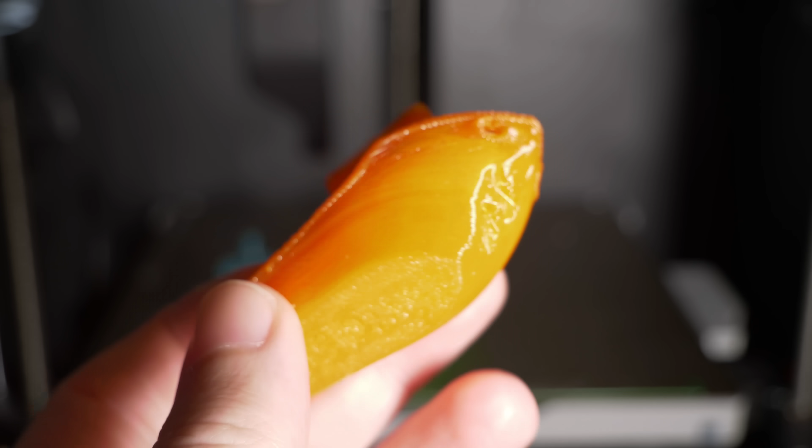How long do you reckon it would take to print a TPU Speedbenchy? It's not the fastest material in the world after all, is it? We know that. An hour? 2 hours? 5mm per second, right? Wrong. Let's go.

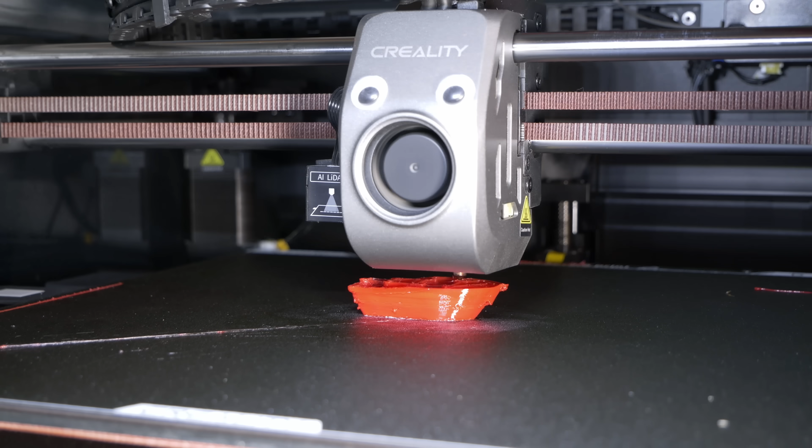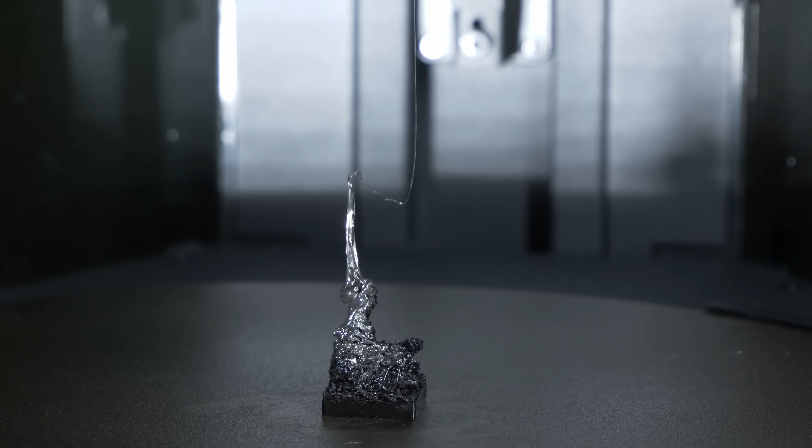So this is 95A TPU. If you came from the other video about softer TPU, then welcome. If not, there are 2 videos out at roughly the same time, and they're both about TPU, but they're both different. They're both valuable. I would advise watching both. It's International TPU Week. It really is, because I have this video coming up too.

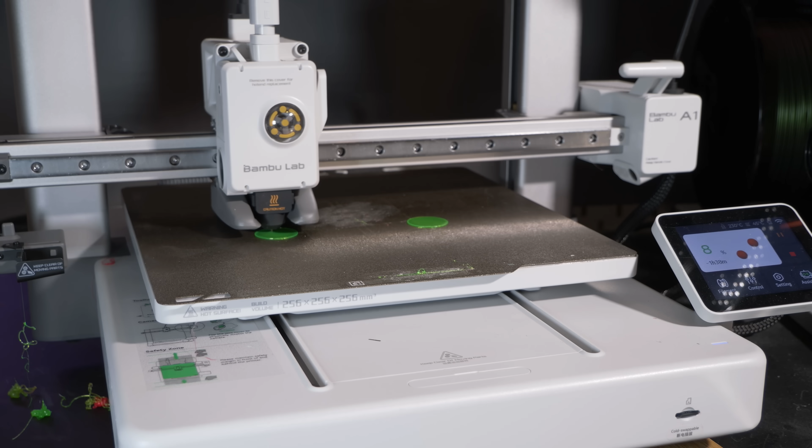But this video here is exclusively about 95A TPU. That is your common everyday TPU that you buy wherever, Amazon, anywhere. If it says it's 95A, then it's 95A. If it doesn't say it's 95A, it probably is 95A. It's sort of become the de facto standard for TPU. Printing it though used to be a hassle. I mean, it used to be a genuine hassle.

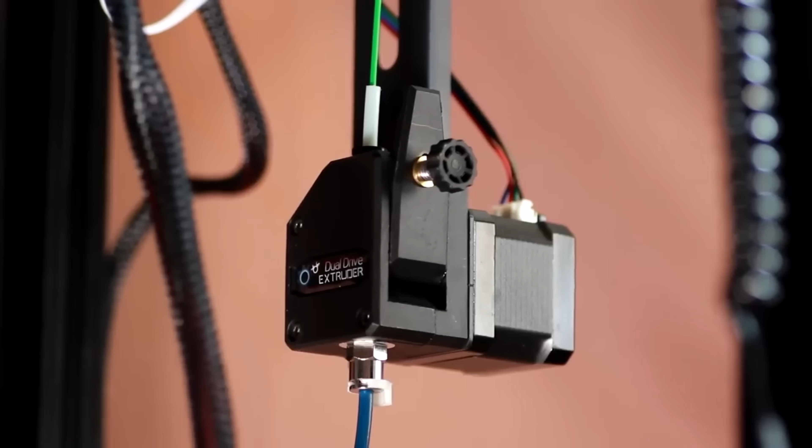So much so that I kind of became popular in the early days of the channel by making TPU tuning videos. Like this all-time great on how to stop your TPU printing like... I should have called it that, but I didn't. And various other videos about TPU. It's 2024 though now, and most of us don't print on these ancient heaps of Bowden. After all, that is the problem. Bowden. It was a mistake.

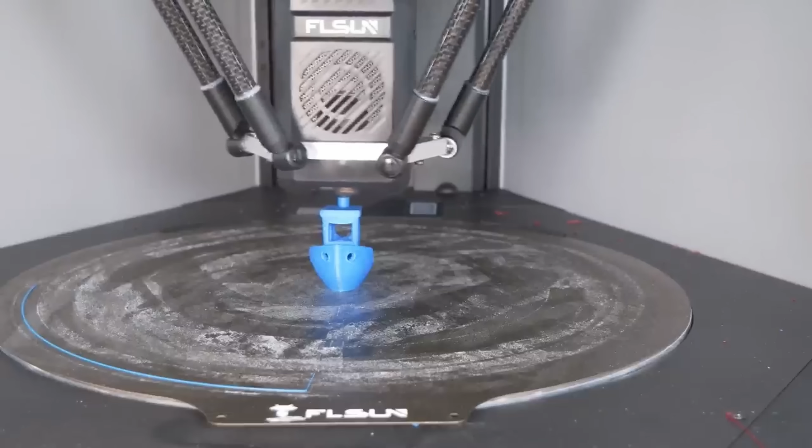I'm referring to this tube that goes between the extruder and the nozzle. And that, coupled with terrible extruder design, they were doing their best at the time, but it was a terrible time to be printing TPU. But those days are gone. Or are they? What we've seen in the last few years of 3D printing is progressively faster machines overall, driven by the unavoidable Benchy arms race. If you want to sell a printer in 2024, it had better do a Benchy in less than 20 minutes, otherwise nobody's going to buy it.

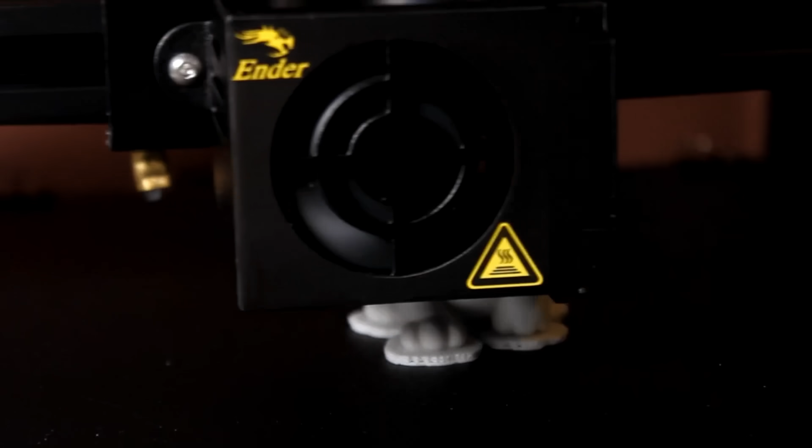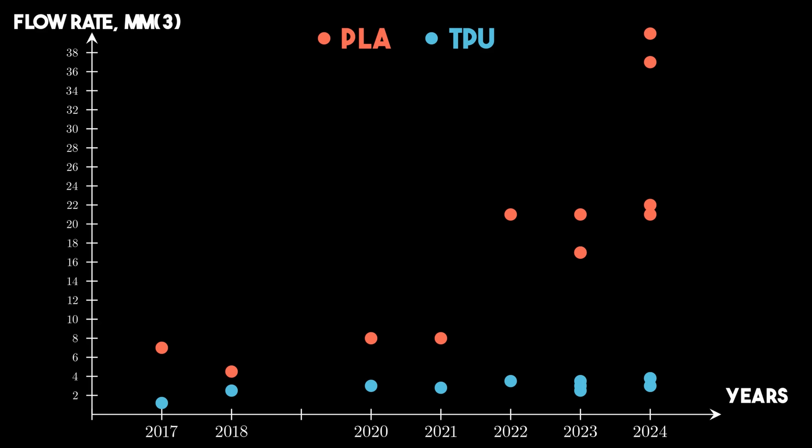What you'd expect to see is a corresponding upward trend in the speeds of all filaments. However, that does not seem to be the case. I did the same thing and charted out the default TPU profile speeds where they existed, or in the historical cases where apparently we didn't do that, we didn't have TPU profile speeds. As you can see, they are not tracking PLA speeds. Not even close. In fact, that kind of looks a bit like a flat line. We can clearly see that TPU speeds have in fact changed very little since 2018 in most cases.

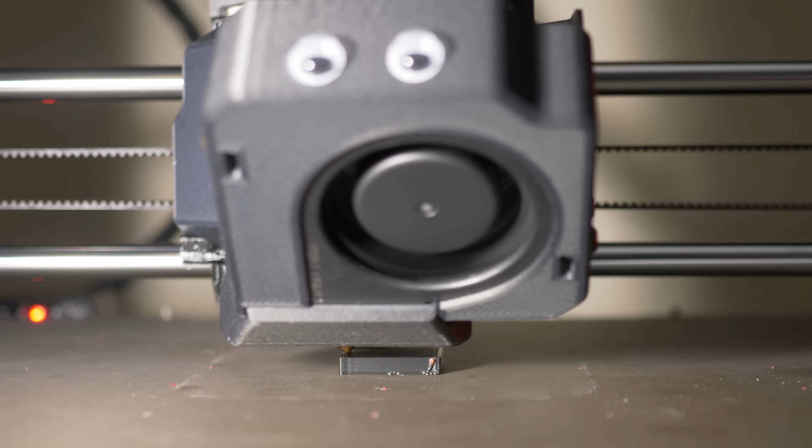If you look at the chart, you would think reasonably that TPU printing is just as slow as it was in 2018, and if you print using those default values, then it will be. Is this actually true? Are printers still just as bad at printing TPU as they were in 2018? That's what I wanted to find out.

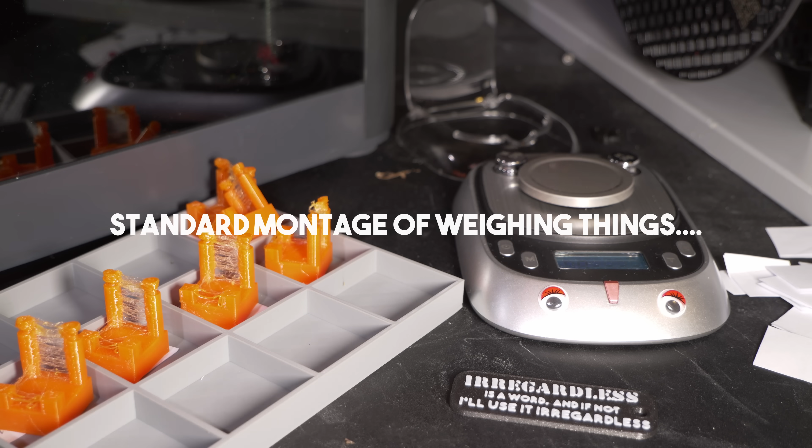This is my completely made up on-the-spot test model. You've probably met it already. The core is printed at 100% infill, so it's sort of a way of testing visual quality, but also extrusion rate by weighing it and using the 100% infill. It also tests stringing. I needed it to also not use much filament because TPU isn't cheap, and I actually bought this stuff myself for a change.

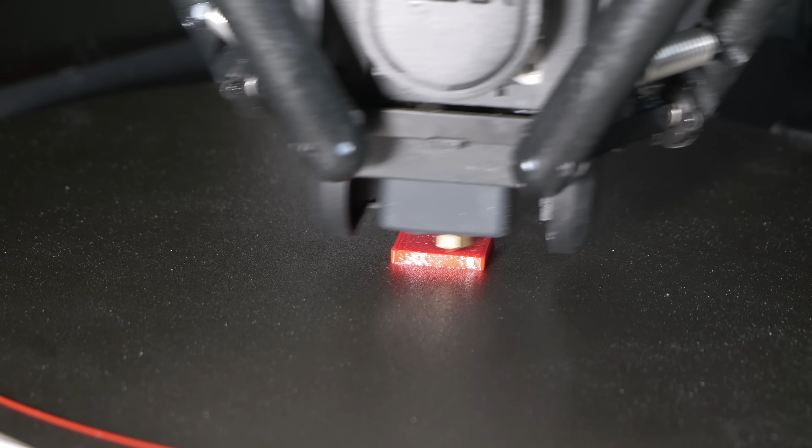We have Sunlu TPU in 2 colours and eSun in snot green. And I have a bunch of printers to test this on, and they're all fitted with 0.4mm factory nozzles, and they're all set up to print default line heights and widths and stuff on default TPU profiles where available. Default at least until I start speeding them up. All the printers performed fine at their default rates. Of course they would.

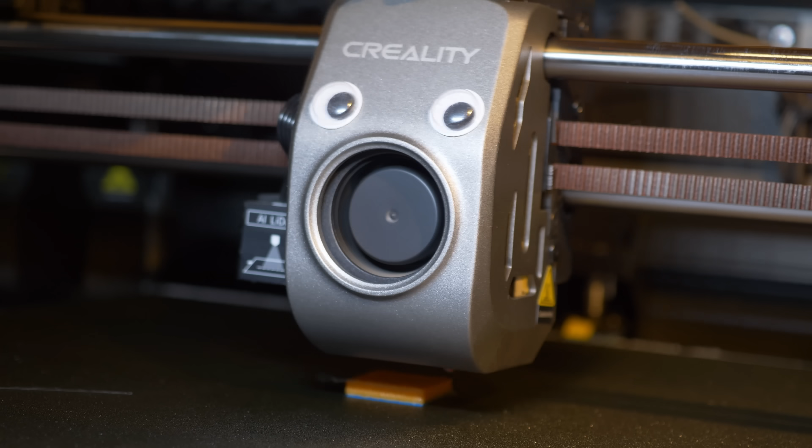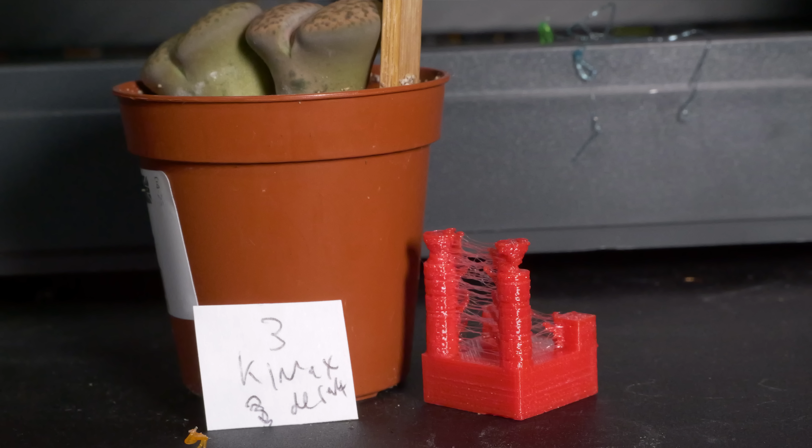These default rates are Bowden era rates, and 95A TPU, it really doesn't pose a challenge. If any printer couldn't do that, then it would be out of the window. They're on the good end of Bowden era rates. It's really hard to effectively communicate flow rate to you because it's not something most of you are used to, so I'll translate on screen.

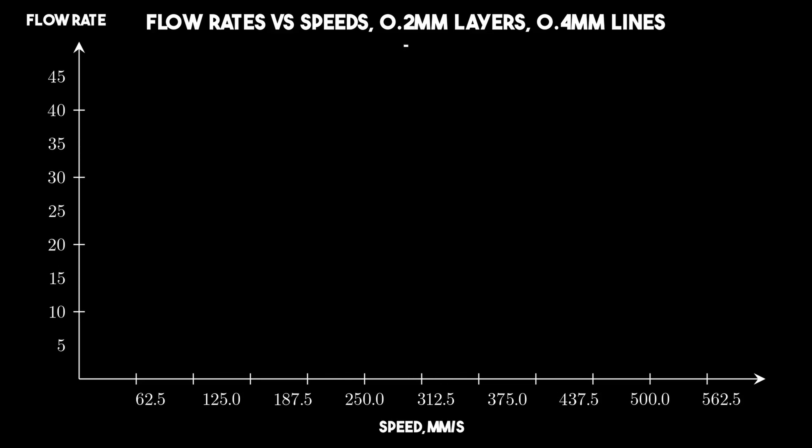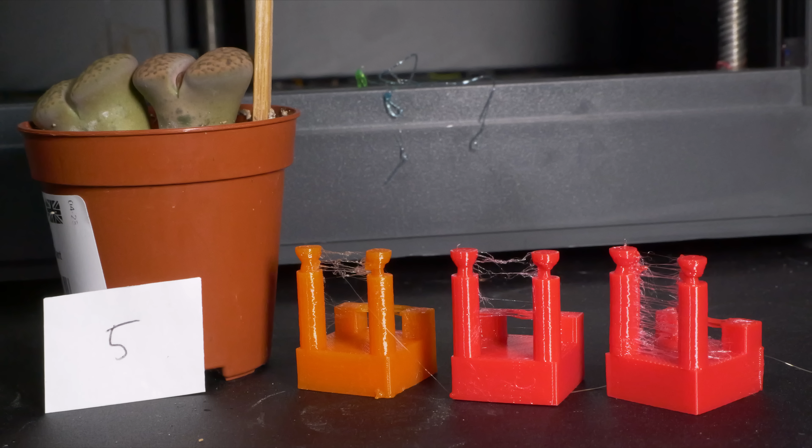3mm³ per second. It sounds slow, but it's not. It's not so terrible. If you had that on an Ender 3, you'd probably be quite happy. I haven't seen anyone complaining now, except me, because it's too slow. 5mm³ per second is getting more like it. This translates to about whatever's on screen. It's a respectable speed. To be honest, if you printed that in PLA, it would be okay.

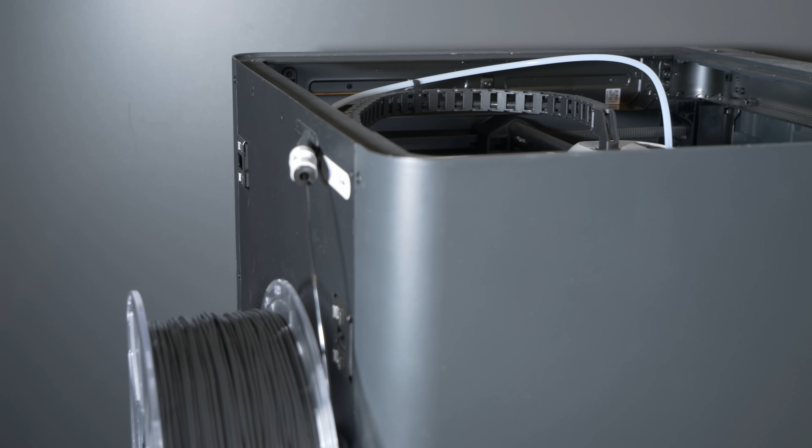10mm³ per second, still fine on all test printers, even the Bambu. I don't know why I'm picking on the Bambu, maybe because it has a reverse Bowden tube. 15 is the upper limit on a V6 nozzle when printing PLA. So that was a hard limit for an Ender 3 or a Prusa in 2018 for PLA.

You would never have got that in TPU either. I mean, definitely not. That would just be ridiculous. And now we're just sailing right past it with TPU. No problems here. 20? No problems either. 25? No problem. Can we beat that?

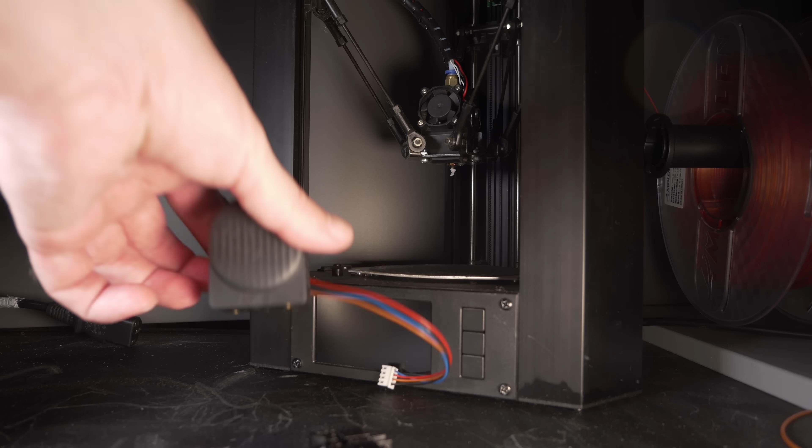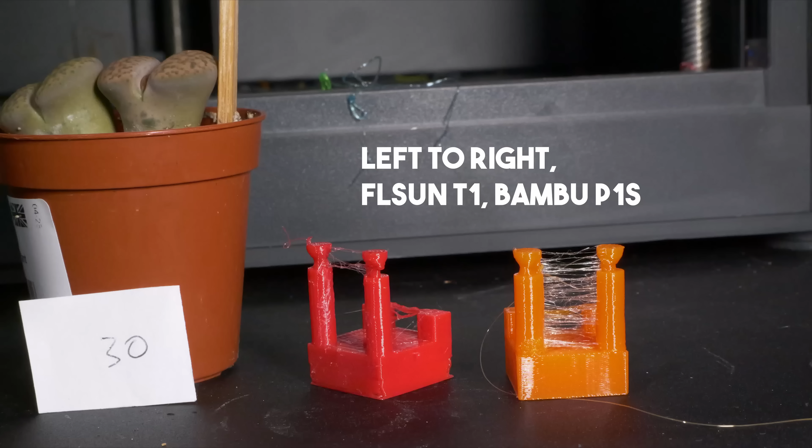So a moment ago we printed TPU at 25mm³ per second on all test printers, and so far as I remember, none of them failed. 30 is kind of where most hot ends that aren't doing something special are not really able to keep up. 35 is the limit for a Volcano nozzle, traditionally on PLA, for reference.

I have a mystery printer here in the results that I can't tell you about. Not yet. And this printer is really surprising me too. I wish I could tell you what it was. I did ask the company in question, and they said no, which seems like more of a reason to tell you. But this printer, it hit 30, and it's not an expensive printer. I would suggest you keep an eye out for the future review of this printer, because that is surprising.

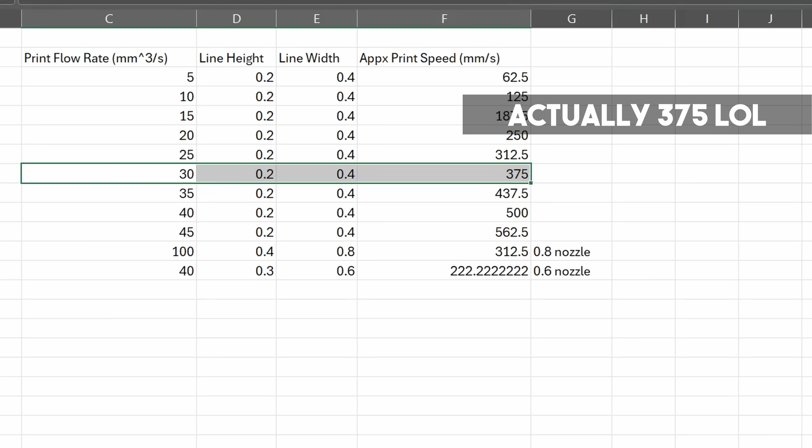That's all I'm saying. I should point out that 30mm³ per second on a default profile lands somewhere around 375mm per second. 300 TPU. And the secret printer went higher. This though, this is the FLSun T1. The FLSun T1 thinks 30mm³ is some kind of joke.

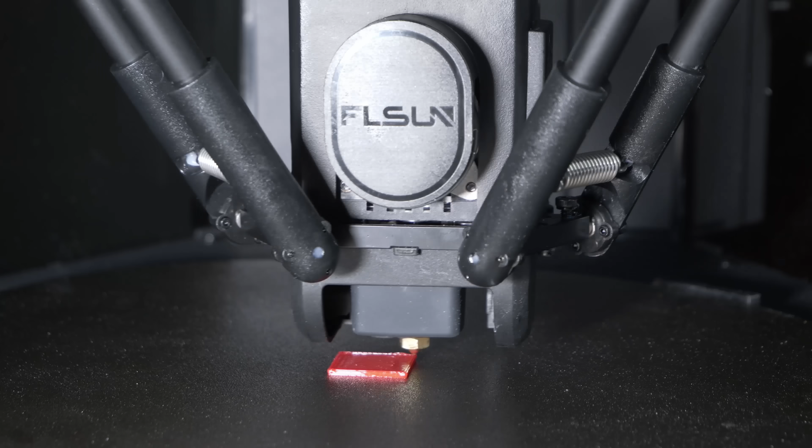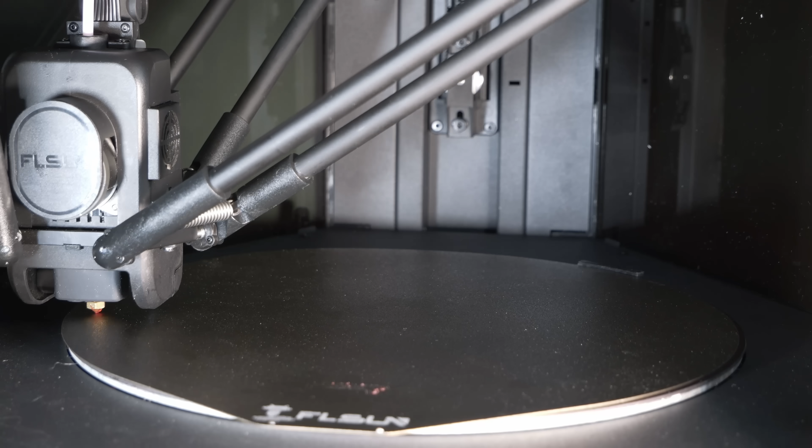It decided to go up to 40mm³. I think it might have gone faster too. I think I was the one who chickened out first. I might have gone to 45, I can't remember. This is where I started thinking, how fast could a Benchy be with these kind of flow rates? So I present to you the 10-minute-ish TPU Benchy.

I should add the caveat, this is important: just because you can doesn't mean you should, with regards to some of these very high flow rates. Many printers might be able to extrude the TPU at these speeds, but they can't necessarily put it in the right place, and of course the higher you go in terms of flow rate, the more you're risking chewing it up in your extruder, and some of these extruders are a bit of a pain to take apart.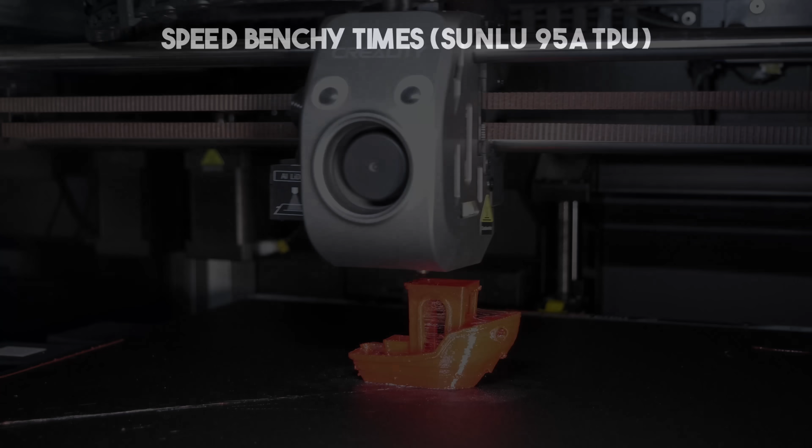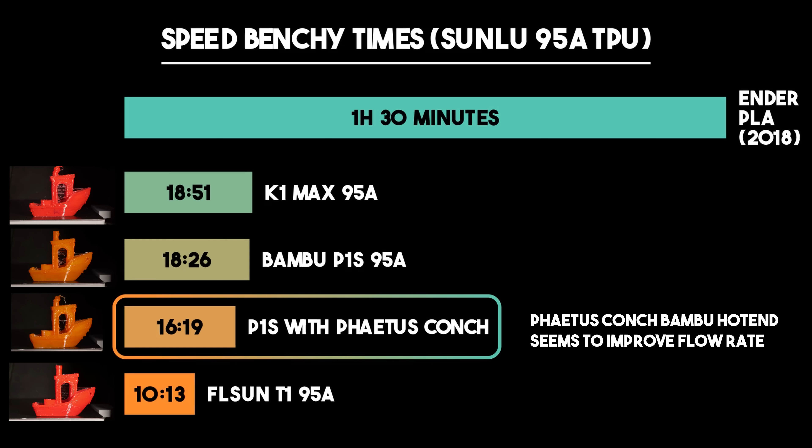A bit of extra info here as well to clarify the point of this video. The caveat from just now is fine, but the point of me seeing how far I can push TPU was to prove that extruders do not fail like they used to. As you gather, the quality isn't always great. This is nothing new. Do the same with PLA, or indeed any material, and you'll get the same behaviour, mainly because you just can't cool at these silly speeds.

And that's why the FLSun T1 with its huge fan does so much better than, say, the Bambu. But anyway, that's aside from the point. The actual point of the video was to show how far out of line the TPU defaults that we currently have in slicers are, and while most printers can go up to hundreds of millimeters per second, you want to be able to print neatly, and that can be achieved with double, triple, maybe even more times the current defaults on TPU. The point isn't specifically to make a TPU Benchy.

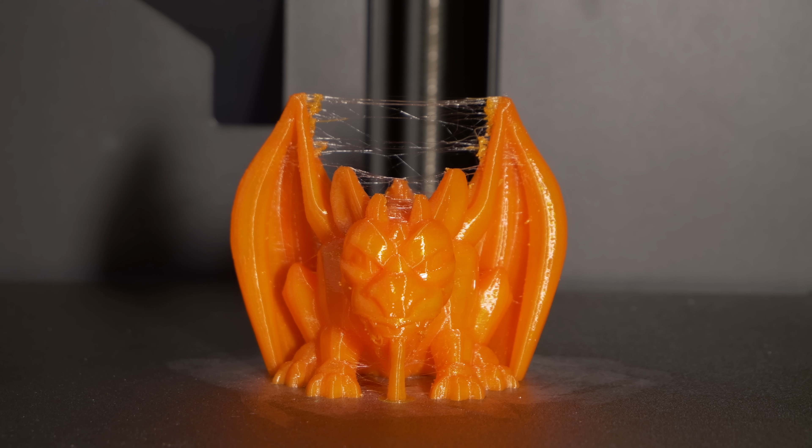While that's fun, the point is we're all wasting a lot of time printing TPU generally still way too conservatively. Take for example this print that I've got on screen where I saved about 2/3 of the time, I think, I haven't worked it out exactly, over the default settings. I want people to make their own profiles, but I realise that some people don't want to do that, or they just don't want to understand the settings to the same kind of level that you would need to.

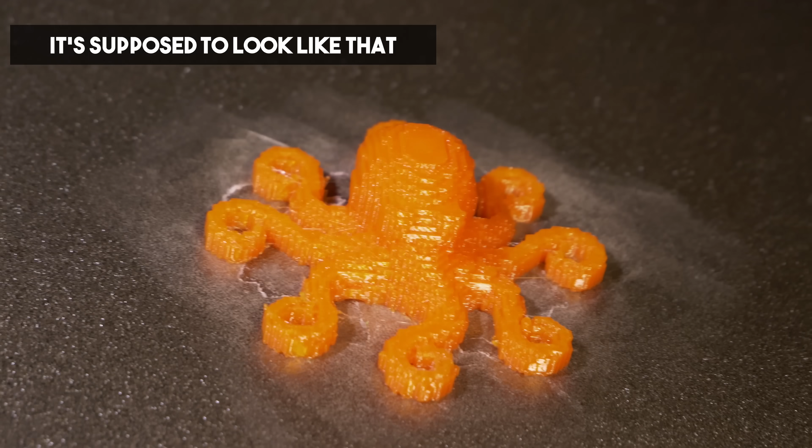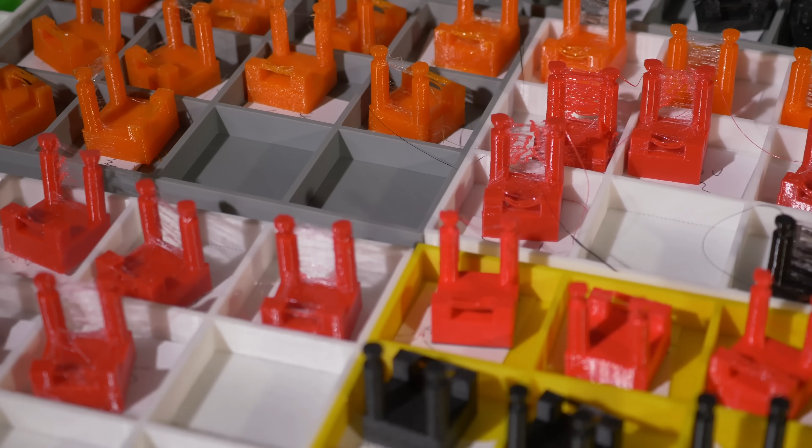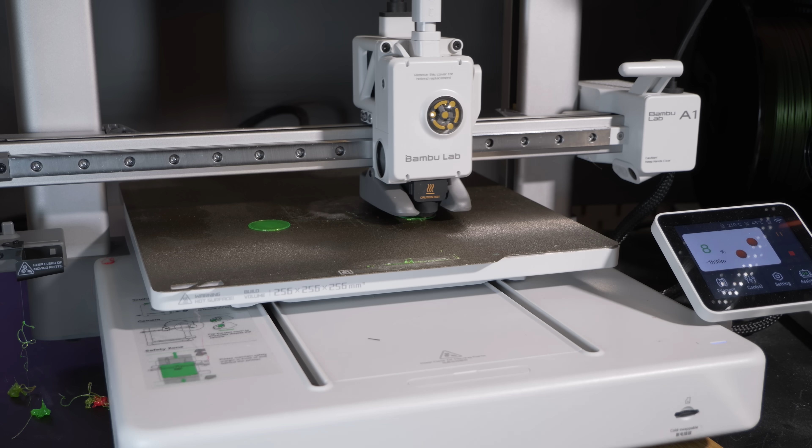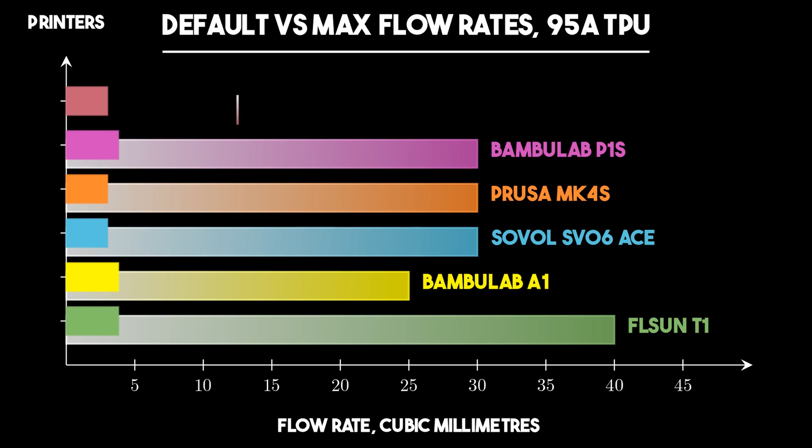I suppose the question is, why? Well, there's two why questions. The first question is, why can they do this? Why can printers print that fast now? And I think the answer is quite weird. Think about this. If you have a modern printer and you print PLA, when was the last time you had to open up the extruder to service it in any way, to remove trapped filament, or to clear a blockage, to do a cold pull?

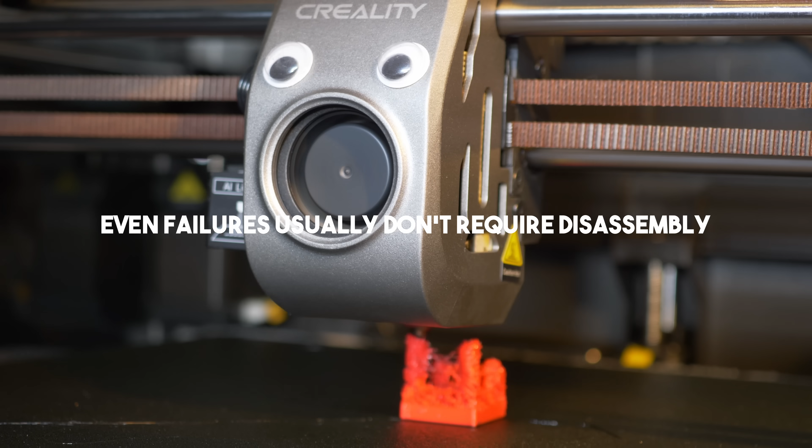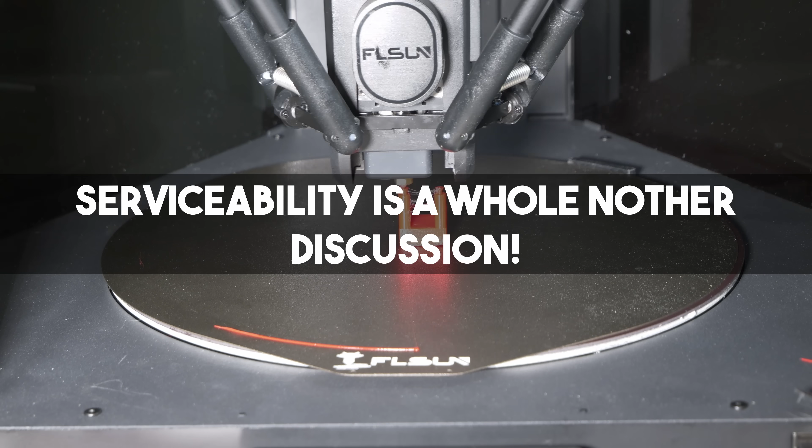Most extruders in the last year or so have gotten a lot more reliable. If you run a Bambu, there's a non-negligible chance you may not even know what the extruder looks like. I personally have never had to take one apart. Extruder design is a whole thing now. Compared to this from a few years ago, we are massively different. These two things are kind of unrecognisable from each other.

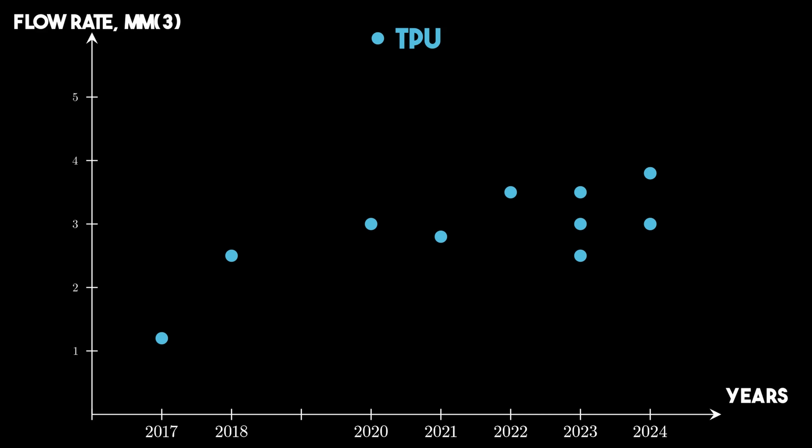The second why question, and this is almost more important: why are manufacturers not speeding up their TPU profiles? Now, I honestly don't know. My best guess is because TPU is a fickle material and they might be too risk averse. After all, if it's not going into the marketing copy, if you're not selling the printer based on a TPU speed, why would you bother spending time trying to tune it? Just get it working. So there is a conclusion here, I think.

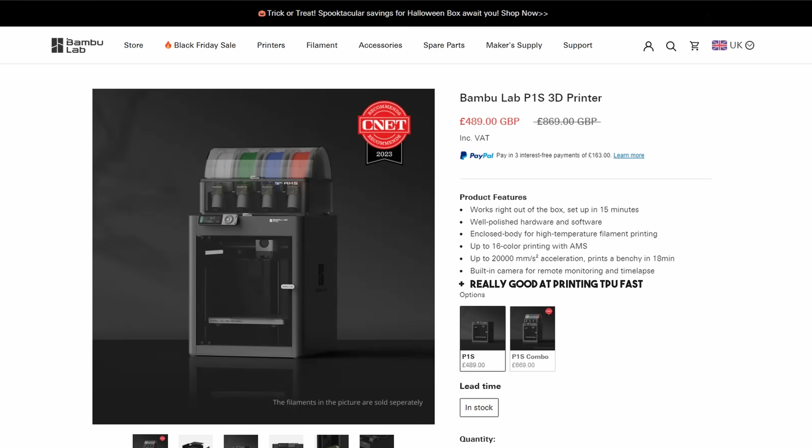The conclusion is to demand more of manufacturers when it comes to TPU. I personally want to see more people asking how fast a new printer can do a TPU Benchy. I'm fed up of seeing PLA Benchies, and I'm sure you are too. Oh, and I suppose the other conclusion is just to get a bit more adventurous with your own TPU speeds. It is not 2018 anymore, just try going a bit faster.